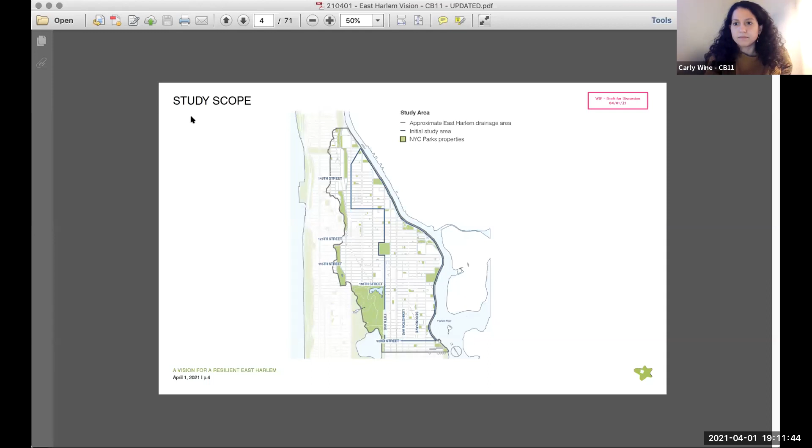Okay, I can help out here. So I see that you did share, you tried to share full screen. So what you're gonna have to do is share a new screen, because it's opening the full screen into a separate window. So if you go to the top where it says you're sharing your screen, share a new screen and select the full screen. I have to do that all the time when sharing. What I'm doing is I just opened up the email, the attachment in my email, and I reduced this screen and have it open in my email.

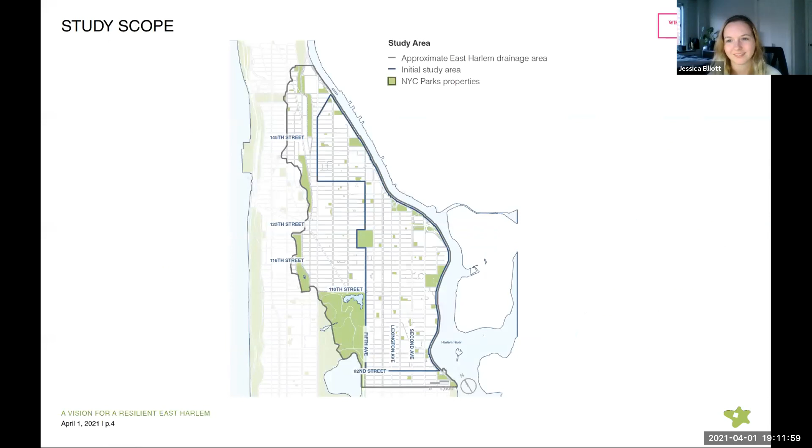So you guys see it working now? You see it advancing? Yes, perfect, thank you. I can't believe we're like 12 months into the pandemic and just finding this out now.

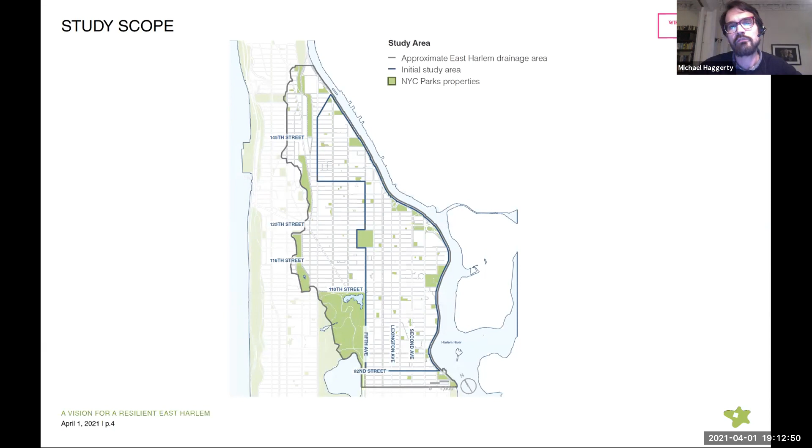Okay, so the study scope. The study area outlined in the RFP roughly corresponded with the floodplain in community boards 11, 10, and 8, and followed the major avenues around that. When we got into the study, we actually expanded the study area for analysis to include the entire watershed of Harlem and East Harlem. This was a 2,500 acre area where we took a broader look to understand the dynamics of drainage from rainwater in this bigger area. That was one of the first ways in which this evolved.

Our study process had 3 interrelated steps leading to the vision. We did work on integrated flood protection — analysis and conceptual design around sea level rise, coastal surge, but also cloudburst events, very large rain events. We had a social resiliency analysis, which consisted of trying to understand social infrastructure in the neighborhood, the kinds of community facilities people access, and the network of community and service organizations in East Harlem. Parks, as the lead, had a particular interest in the open space system, and as landscape architects, that's one of our lenses.

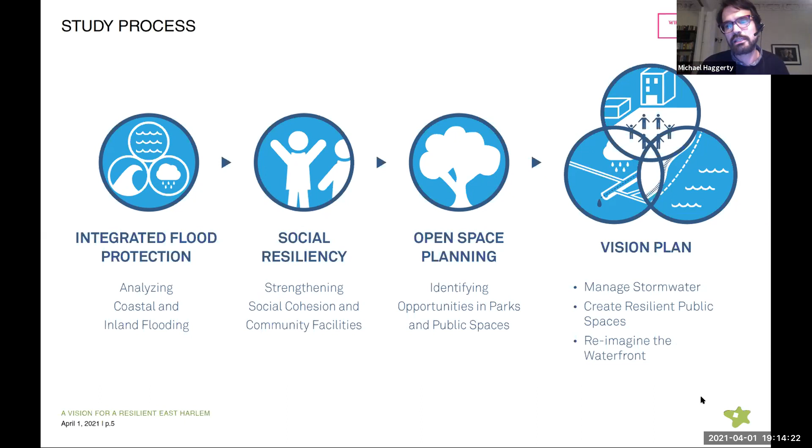So we looked closely at all kinds of open spaces — public parks, plazas, but also open spaces on NYCHA properties and private properties. Through these 3 studies, we then developed vision recommendations with 3 themes: managing stormwater, creating resilient public spaces, and reimagining the waterfront.

Did you see that change? Okay, so I just wanted to talk a little bit about what's unique about this study, and what's unique about vision planning, and why we did it with the city.

One reason is to understand risks. So we analyzed these 4 climate risks: sea level rise, coastal surge, cloudburst events, and urban heat and extreme heat. We wanted to understand what is unique about these risks in East Harlem — how do people experience them, and how does the topography and built environment of East Harlem relate to these risks?

We also wanted to explore solutions. When you start to look at it, there's no one solution for these risks — you need lots of solutions working together. Part of this process was to understand what kinds of solutions you would apply in this neighborhood, and how those solutions can support other goals of improving the public realm and bringing amenity to the neighborhood.

And then we also assessed the feasibility of these solutions. Working closely with city agencies, we looked at policy issues, considerations related to funding, constructability, overall city policy, how infrastructure is operated — to understand, from best practices, the opportunities and constraints for developing them in East Harlem. This led to recommendations, which we'll get to at the end.

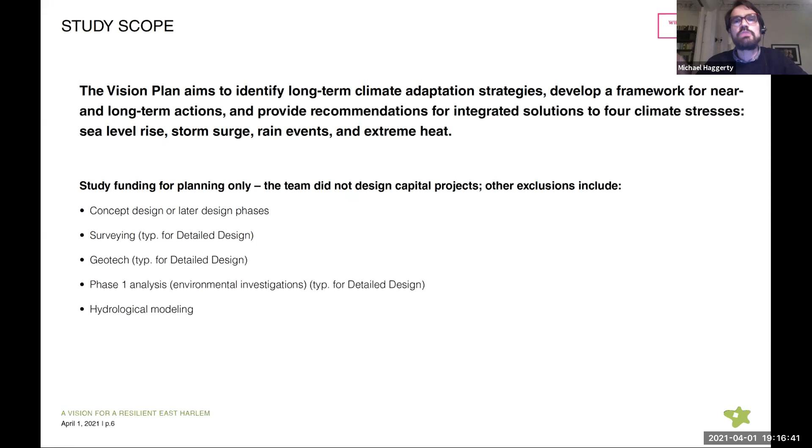We had a pretty lively community engagement process over 2018.

It had several different forums. We had a project advisory committee that we met with twice. That committee involved organizations that were community-based organizations, affordable housing developers in the neighborhood, cultural institutions, and health institutions.

We had 2 community forums. Both of these were at DREAM. That was really important to the study in terms of working with the very strong network of relationships that DREAM has with families in the neighborhood and also other organizations.

And then we also did quite a bit of tabling, six events in the summer of 2018. What we did for that, we went out and really asked people about social infrastructure as well as their experience of climate change, to try to understand how people are experiencing these issues in everyday life.

Another aspect of the outreach was that we actually developed a curriculum about climate resilience and taught this curriculum at DREAM Charter School. This was a semester-long class with 9th graders. It was actually the first cohort of high schoolers at DREAM, and it was experiential learning.

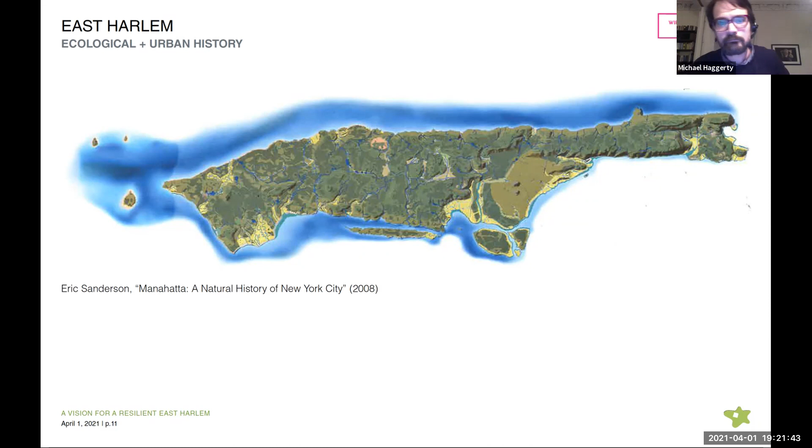And then also, because of the topography, Harlem Creek, Marcus Garvey Park, the hill there, Carnegie Hill - water historically drained through the area that is roughly 106th Street and 108th Street. When you look at more contemporary maps, like the Viele map from the Civil War that overlaid all of these historic natural features with the grid of Manhattan, you start to see how the grid was overlaid and land was filled in, but water more or less wants to still behave the same way. It wants to absorb into an area like a marsh. It's low lying, so that's an area that will flood. And then it wants to follow the topography out to the Harlem River.

Another really interesting set of maps we found that was kind of surprising was we looked back at old Sanborn insurance maps that were made of the city. The one on the left is of Thomas Jefferson Park in 1927. The one on the right is the same view, but in 1954 after Harlem River Drive had been constructed. This was kind of like a revelation to find out that Thomas Jefferson Park used to connect to the river, and there was an esplanade and a direct open space connection from East Harlem to the Harlem River.

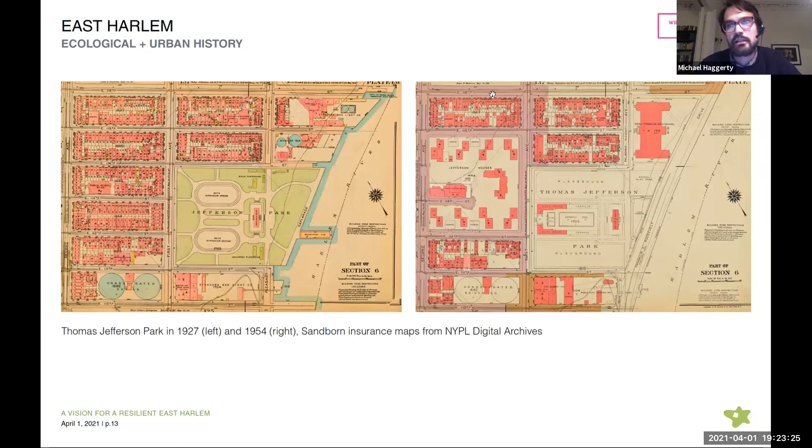But then, of course, decisions and planning in mid-century New York really cut the neighborhood off from the river. This is a real spatial equity issue that's been with the neighborhood for many years, not being able to access the river. So this was interesting to us to think about - well, in planning for resilience, how do we also address waterfront connections and some of these spatial equity issues that we're living with.

To get into the risk analysis, we start by looking at the topography of the neighborhood, which is on the left. What you can see is there are low-lying areas, which are the bluish, purplish areas. That's roughly where that tidal basin was, and roughly where the floodplain is today.

There are really two kinds of profiles as you go from upland in Manhattan to the river in this part of the island. This first section is cut further north, closer to 134th Street, and what you can see is that the land slopes from west to east down towards the river in a pretty continuous way.

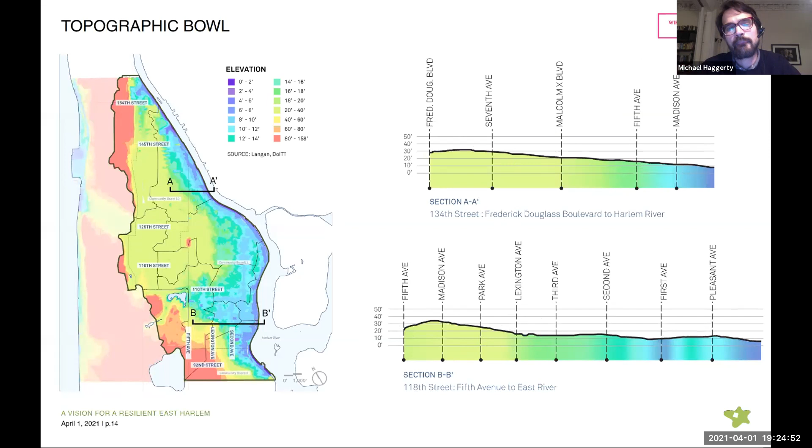When you look at the second section, cut through the heart of East Harlem, the topography has these basins in it. It isn't a straight slope, but rather there are bowls where water can accumulate. So you're dealing with both a low-lying area and an area with these kinds of basins, which are important to know about for stormwater management and drainage.

In this risk assessment, we did synthetic storm modeling, where we took projections from the New York City Panel on Climate Change reports to model two different flood scenarios, a low one and a high one. These scenarios combined projections for sea level rise, 30 inches by 2050, and included a cloudburst event, which is a really fast rainstorm.

We looked at the current 5-year rainstorm, which is the current cloudburst at 4.7 inches over 24 hours. Then we looked at the future cloudburst, which is 5.88 inches over 24 hours, and combined that with a storm surge.

In the low scenario, we looked at what is like a 5-year storm, kind of like a nor'easter storm today. And in the high scenario, we looked at the future 100-year storm, which would be something like a Hurricane Sandy.

The significance of these two elevations: this low elevation of 8 feet is basically dealing with flooding from high tides and a lower order storm. The 17.5 elevation is looking at what would be a future 100-year storm, or a future Sandy-like event or larger.

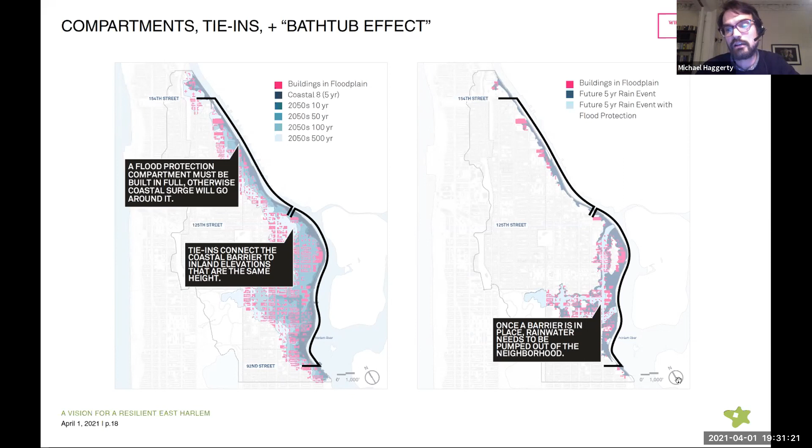And then just to show this in a different way, this is like an imaginary section from the neighborhood, showing one of these basins on the left here. So if the sewer system, which is the orange line here, and the outfall, if that's not working because of sea level rise or because of surge, you're going to have water accumulate in these basins. And then what we're showing here conceptually is that, well, if you build a barrier to keep out storm surge, you're going to have rainwater that backs up against that barrier that needs to be pumped out somehow.

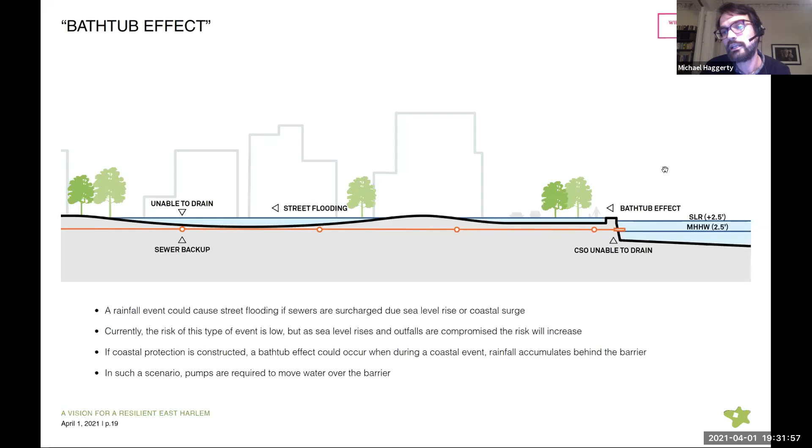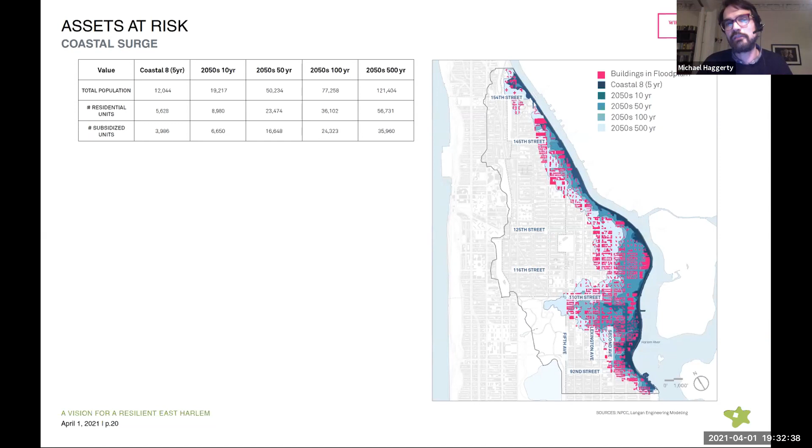This risk assessment then also used GIS to quantify the risk. We looked at population, housing, subsidized housing, critical infrastructure, parks, the transportation system, to quantify under these different flood scenarios, our high and low scenarios, but then also 10-year, 50-year, and 500-year floods, what assets were at risk from flooding. We did that for both the coastal events and also for the rain events.

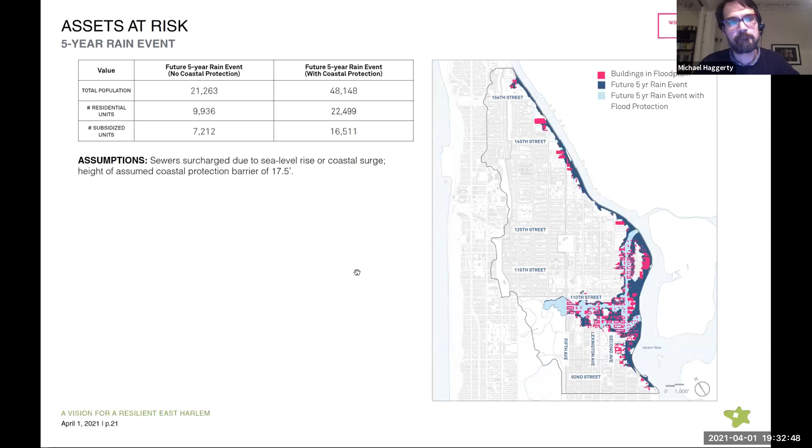That risk assessment data basically gives you the number of buildings exposed to flooding in a 100-year event, or the number of hospitals. That data was used to calculate avoided costs, which is just another way of saying the damages that an event would incur. And those calculations of the avoided costs supported a cost benefit analysis—basically a calculation of what is protected through flood protection and the value of those assets.

So cost benefit analysis is not a tool required by policy in New York City for funding projects, but most federal funding agencies like FEMA, the Army Corps, or HUD use cost benefit analyses to evaluate funding applications. So we use this tool in order to begin to align the analysis of this study with potential funding sources for projects.

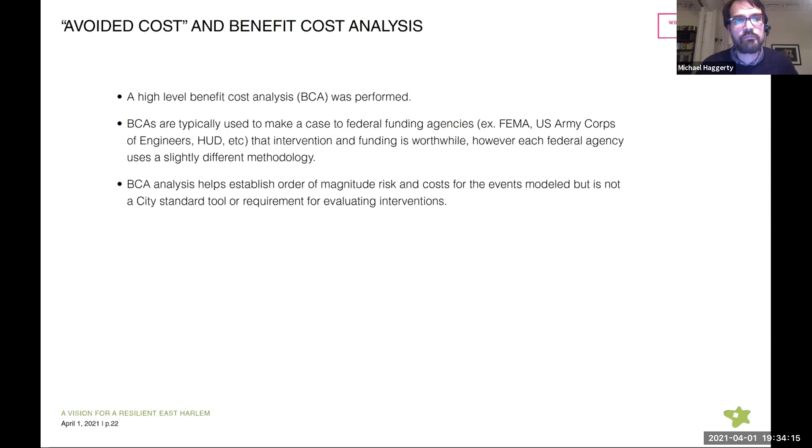The methodology used for that is called HAZUS, a tool provided by FEMA. It's basically like a spreadsheet where you input different figures for buildings at risk, building contents, open space assets, etc., and it calculates the present value of those assets over time. So we were able to look at a 50-year time period of potential flood events to understand what the cost would be.

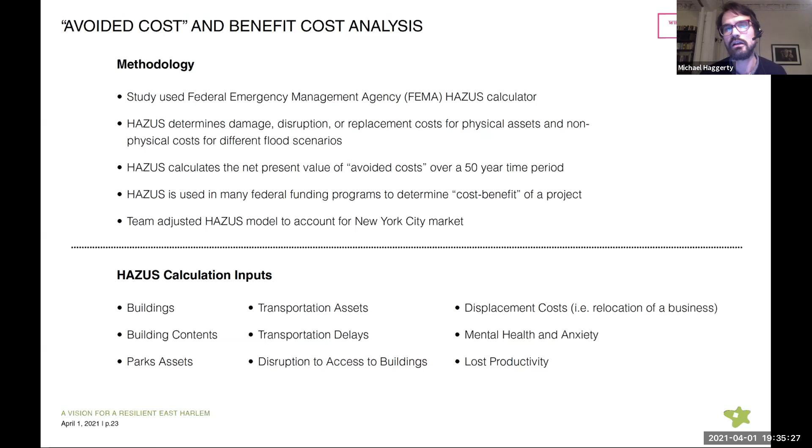There's actually a lot of detail that goes into this kind of analysis, and we needed to adapt the tool for the New York City market in terms of prices for buildings and those sorts of things. But it also includes what you might think of as intangibles, such as transportation delays, the cost of a business or family having to move, mental health costs, lost productivity. So there's actually quite a bit of detail that goes into those.

So this slide is showing some of the results of the avoided cost analysis.

One of the really important things we noticed when we did this analysis was that the avoided costs for the low scenario, like an elevation 8 event, were about $500 million. But when you went up just one increment to a 10-year event, or about a 10.5 elevation, that avoided cost almost tripled. So that told us there was a real gain in a slightly higher elevation than our low elevation in terms of the assets that could be protected.

The other thing this analysis showed us in terms of the cloudburst events, which is the table on the right, is that the avoided costs over time of the cloudburst events could actually be a lot higher than some of the storm surge events. The reason is because they're 5-year events, so they're projected to recur with more frequency. That told us there can be real value to a strategy that aims to mitigate the flooding from rain events.

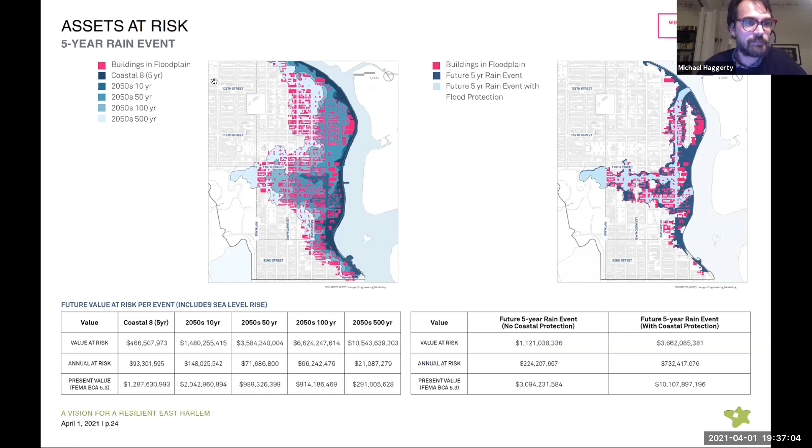So overall, in terms of the risk assessment, there were a few big findings. I won't go through all the bullets, but one big finding was the relationship between coastal protection and inland flooding from rain events - you can't really address one without addressing the other, and whatever solution we design, those two issues need to be addressed in coordination. It also told us there isn't a single solution to any of this, that it needs to be many solutions working together. And because it's many solutions, that gives us opportunities to think about co-benefits with climate resilient solutions in terms of improved public space or community spaces.

So those are the big findings from the risk assessment, and now I'm going to go into the vision framework.

From the project design perspective, there are a few important ideas. One is that we really thought about resilience in terms of urban systems - that it's not just about coastal protection, but about drainage infrastructure, transportation, public spaces, and housing. So when we thought about solutions, we were considering ones that cross-cut across different urban systems.

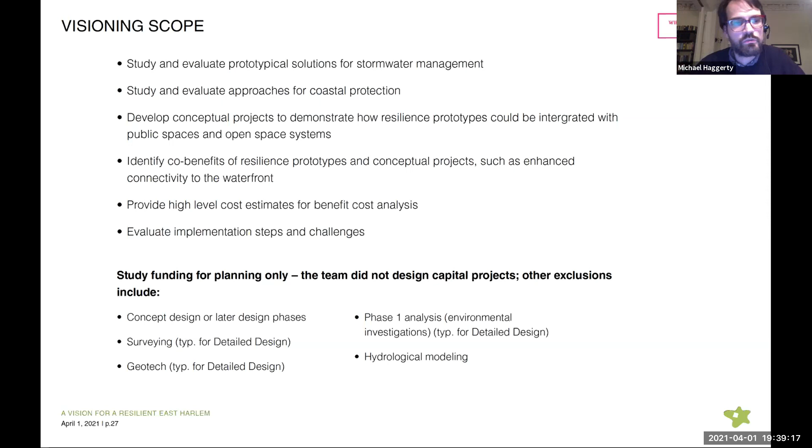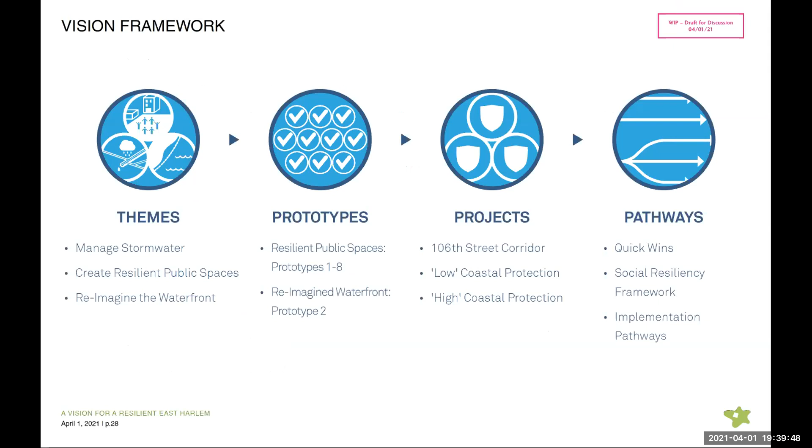The framework - getting back to the table of contents and outline of the study - is that we established three themes: managing stormwater, creating resilient public spaces, and reimagining the waterfront. What we did to expand upon these themes was first to develop prototypes for resilient public spaces that can manage stormwater, and then we developed three conceptual projects.

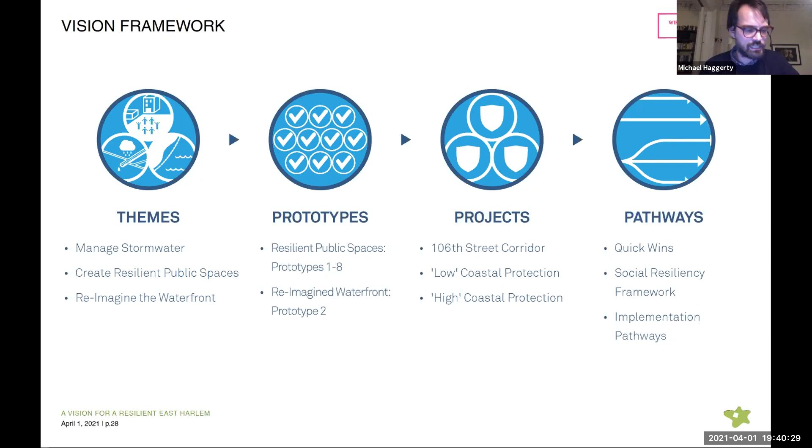These are more planning feasibility studies than conceptual designs. One of these projects looked at the 106th Street corridor and considered how to make that into a stormwater detention and conveyance corridor and an improved public space. The two other projects developed ideas for a low coastal elevation solution and a high coastal elevation solution. Lastly, we looked at how to make this happen - what are the implementation steps and policy considerations.

So this diagram represents those three themes mapped into the space of East Harlem.

The vision considers a reimagined waterfront, strategies for providing coastal protection and connecting waterfront parks to the river. It looks at utilizing streets and public spaces for stormwater management and creating an interconnected system for stormwater management. It also looks at social infrastructure in public spaces and how to make them safer and better connected, while also having these resilience functions.

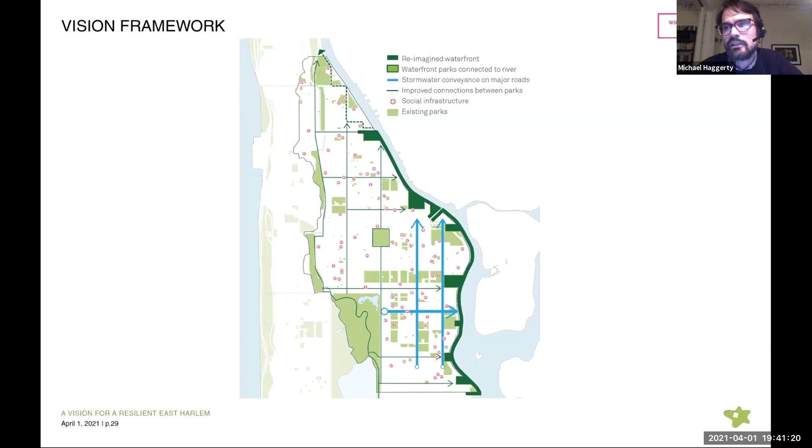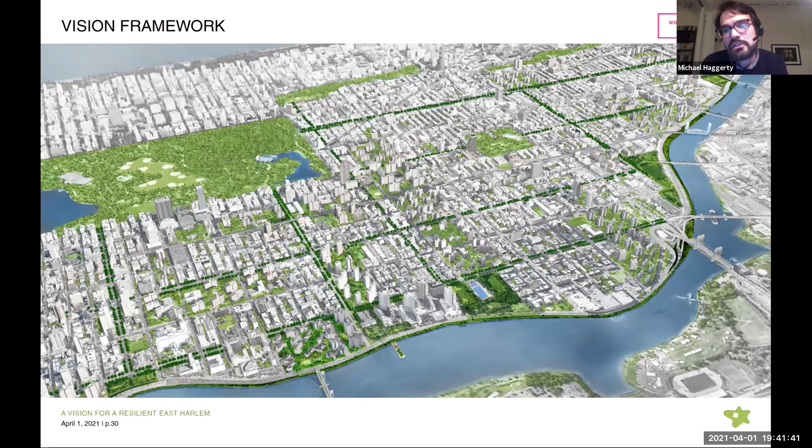In a vision of the neighborhood as a community, parks are connected to each other, people have access to the waterfront and also to Central Park, and open spaces serve resilient functions.

So I'll walk through how we expanded on those three themes and the prototypes and conceptual projects. As we talk about the first theme, managing stormwater, there's a little more analysis we did to better understand what's going on with the water from cloudburst events in the neighborhood.

I'd mentioned earlier that there are two profiles. There are areas of the neighborhood where rainwater basically sheet flows to the river, and then there are areas that have these basins where water can sheet flow but can also accumulate in low points.

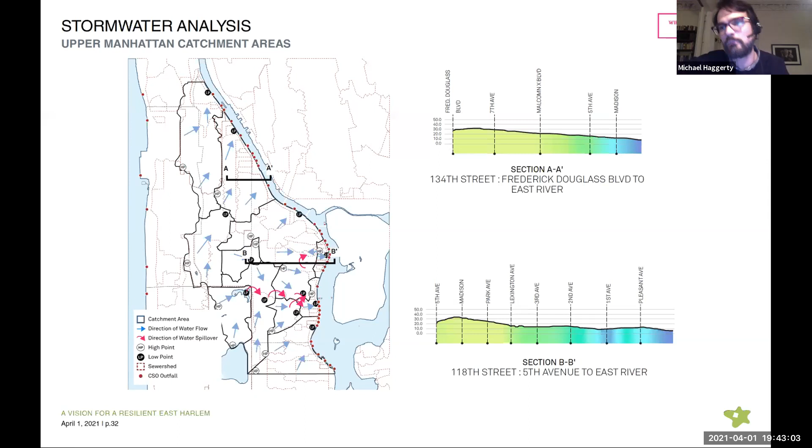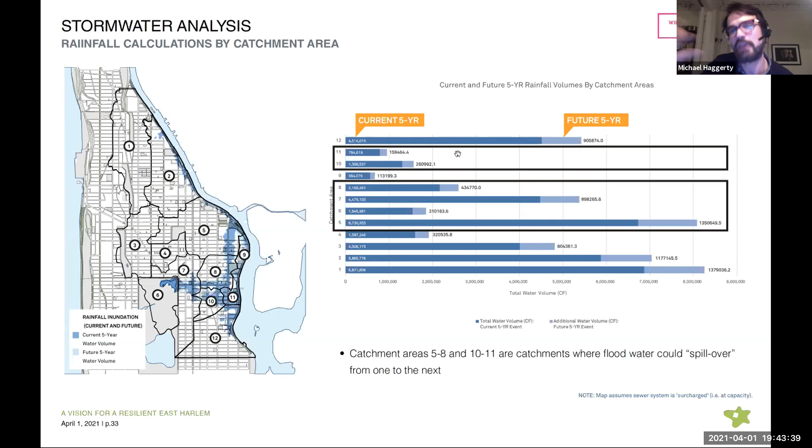We did some analysis where we quantified the cubic feet of water in each of the catchment areas that you'd have from this kind of cloudburst flooding. So in this map, the blue is showing the inundation area of the rainfall event. The black shows the different catchment areas or drainage areas of East Harlem. And these graphs over here that we outlined are the calculations of the amount of water that you have in each of those. And it's a lot of water.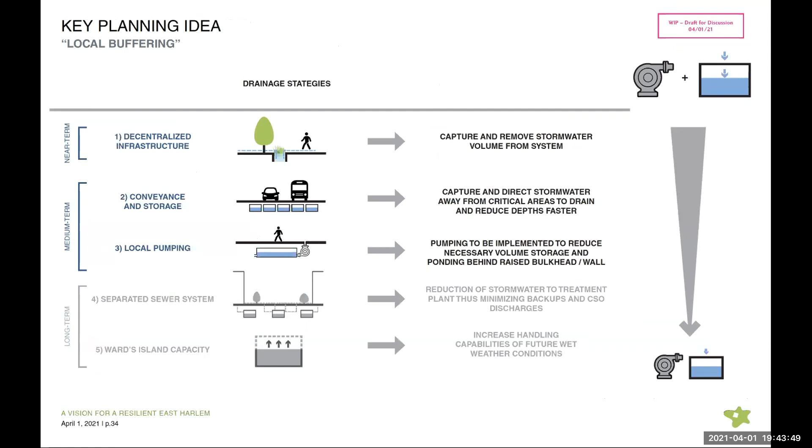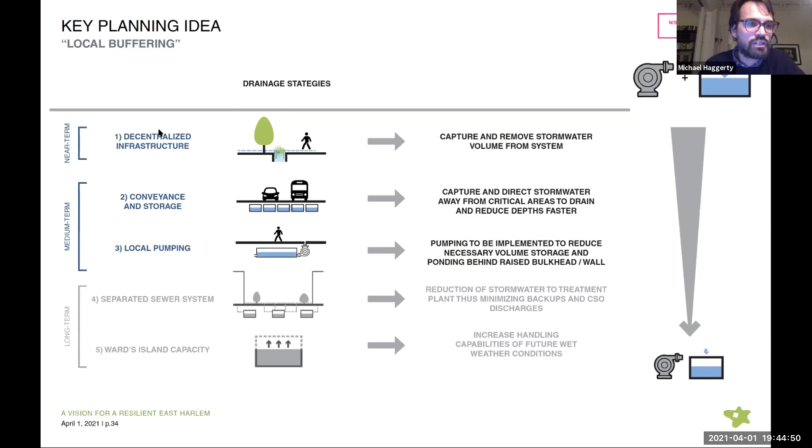So one of the key planning concepts in terms of managing stormwater is this idea of local buffering. How can we use green infrastructure, like infiltration in permeable surfaces, storage under parking lots or under paved surfaces, swales, in order to capture and detain as much of that rainwater as possible before it goes into the sewer system. Now, as our analysis shows, you can never really capture and store all of this water, but it's important to do as much as you can, and there's a cost benefit to it. As I mentioned before, if you have coastal protection and need to be pumping water and managing it with gray infrastructure, the more water you can detain with the green infrastructure, the more it reduces the size of the pump that you need, and reduces the amount of gray infrastructure that you need.

This idea of local buffering really implicates every kind of surface in the neighborhood for stormwater management: capturing water off of roofs, storing that in open spaces, or storing that subsurface, also using streets and reconfiguring the right-of-way, both above ground and below ground, to capture, detain, and convey water. So those are some of the ideas that this diagram is showing.

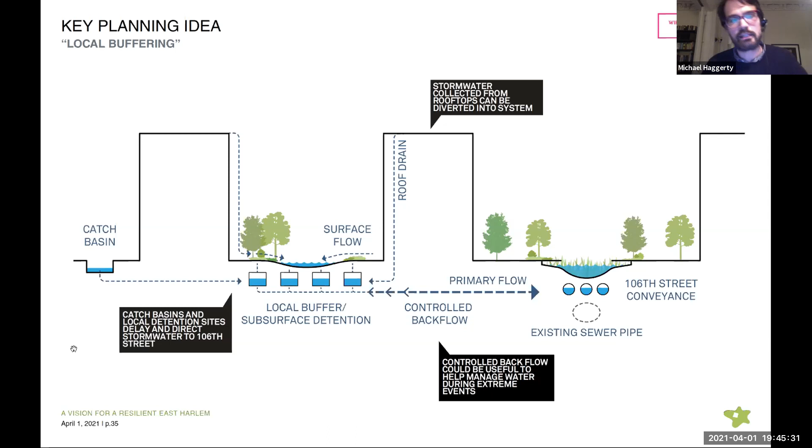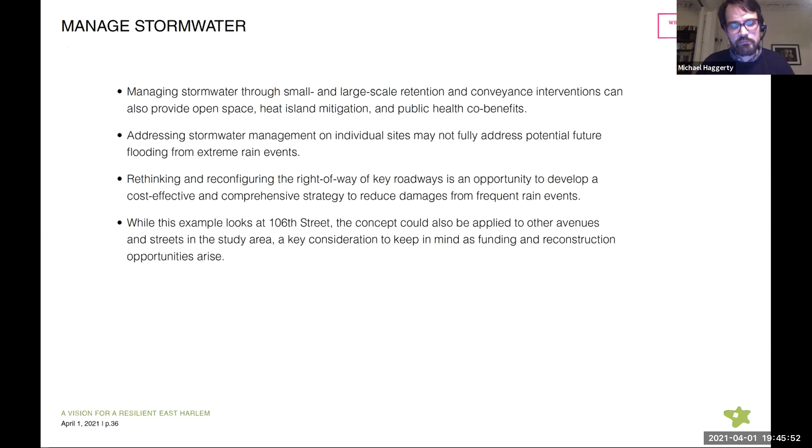So overall, what this theme was looking at was, first of all, how all green infrastructure can count and have a benefit. And then, if you are developing green infrastructure on a pretty big scale, how can that improve the public realm? Our conceptual project tried to tie all of that together around 106th Street.

Just a side note, 106th Street is a really interesting street. First of all, it was actually planned as a river-to-river street, and in the Manhattan plan, it was the northern boundary of Central Park. For that reason, it's extra wide — 100 feet wide with a 60-foot curb to curb, and it has a lot of striping down the middle, kind of excess space. It also happens to be the only street in East Harlem that connects all the way from Central Park to the waterfront, because there are so many super blocks and public housing and co-ops. It's the only continuous street, and it is in that historic area where the Harlem Creek was.

So what this conceptual project looked at was: can we find a model for reconfiguring streets, prioritizing bus, pedestrian, and bicycles, adding landscape to the street that can serve as green infrastructure, but then also increasing the capacity of the subsurface drainage in order to hold some of that stormwater.

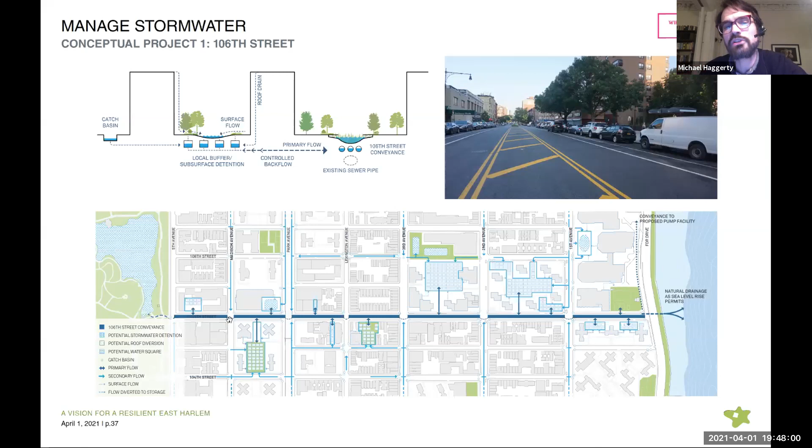We envisioned 106th Street as this kind of collector with branches coming off of it. Those branches would connect to green infrastructure installed on a variety of sites — playgrounds, open spaces in the tower in the park developments, parking lots, and other kinds of spaces. So this was envisioned as a system where you might have green infrastructure at Franklin Plaza, for example, or the Carver houses, and that water would be detained there, but then also drained to this new major drainage corridor.

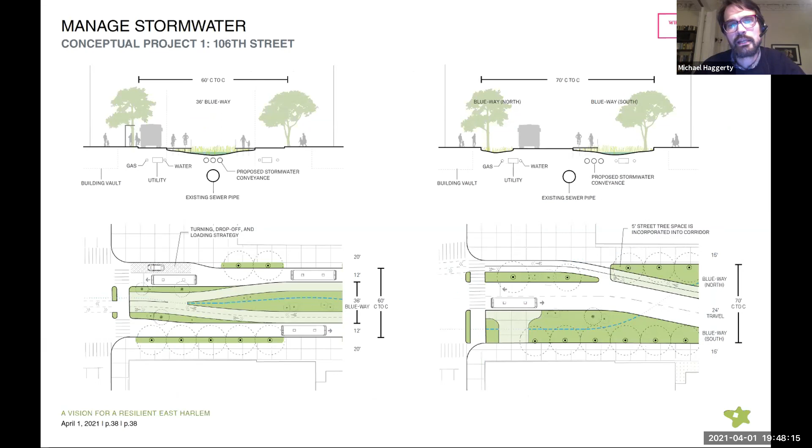There was some study here of: if you do this, can you prioritize buses? Can you prioritize bike lanes? And then also, can this corridor become this new kind of green space and green spine and commons that's shaded and cool and a social space for the community?

So just a couple of caveats about this study, and we don't have all of the solutions yet for this. One is that it doesn't manage all of the stormwater - it's a partial solution. But there's a benefit in this strategy in that it reduces the amount of gray infrastructure that you need.

The other consideration is parking. This proposal is taking all of the parking away, about 250 spaces. And then you also have loading - there's a couple schools on 106th Street that have bus drop-offs. So if you're really going to develop this kind of approach, there are a number of transportation issues to be resolved, both with city agencies, but then also with community members and institutions.

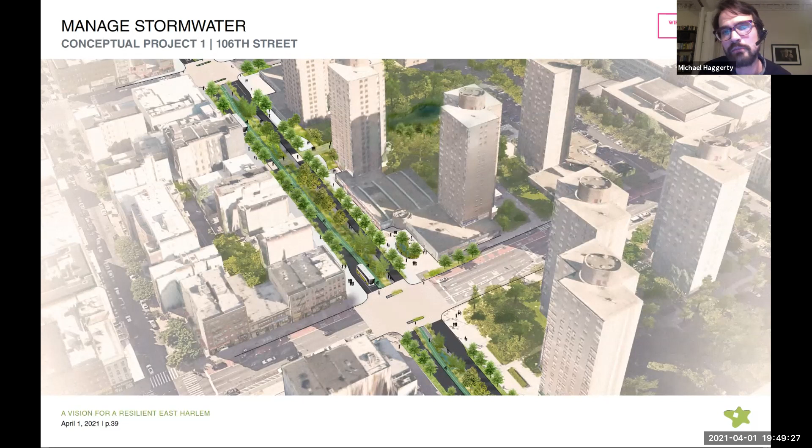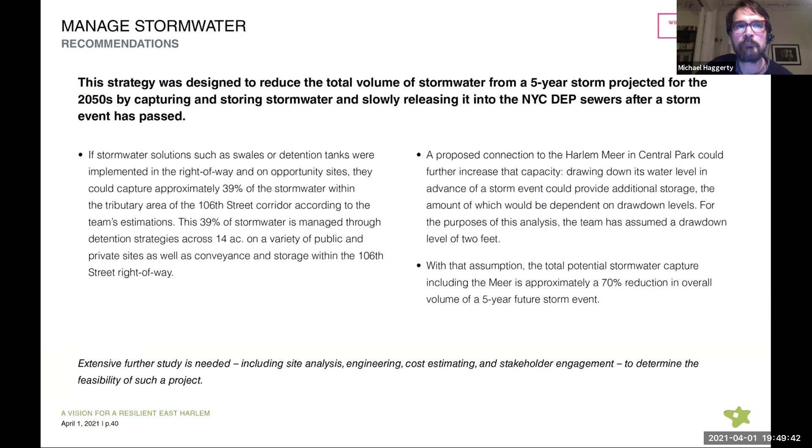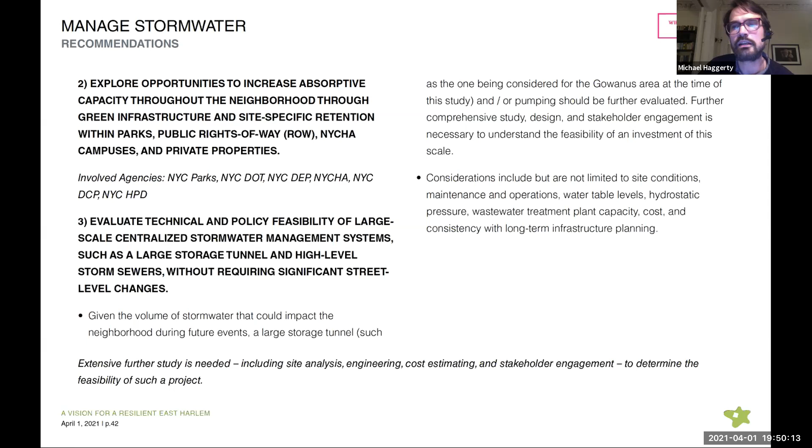So each of the themes has a series of recommendations, and here, this is where all the text is - I'm not necessarily going to go through all of this. But what we tried to do with the recommendations was chart out what are the next steps that the city needs to be taking in terms of study and analysis and feasibility in order to start to achieve some of the goals of the theme. These range from studying potential for green infrastructure across a range of different sites, to further engineering study of large scale storage. So this will all be in there for you guys.

So on to theme 2, create resilient public spaces. One of the principles of the planning was, how do you create high performance multifunctional spaces? East Harlem and also Harlem just has a lot of different kinds of open spaces and a lot of public spaces, parks, playgrounds, which fall into the domain of city-owned properties, but then also all of the open space around NYCHA properties, plazas that are on like the co-ops, for example, as well as parking lots.

So this part of the study asked the question, well, if we're trying to create this network of green infrastructure, how do we do that in a way that also improves these public spaces and improves the social infrastructure of the neighborhood? The theme had about 9 or 10 case study sites that we looked at. No coordination was done with the owners of any of these sites - we looked at them because they were prototypical, and you could find many instances of them throughout the neighborhood. But these ranged from community gardens to apartment super block apartments that have open space and parking lots and playgrounds and other kinds of spaces.

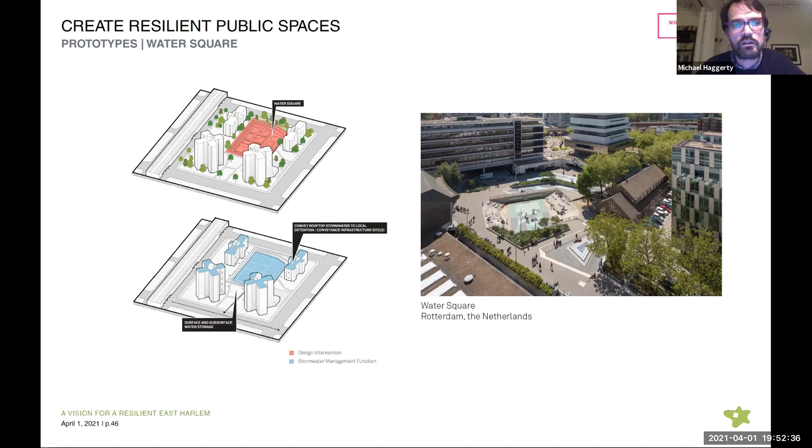So one area that we thought you might apply this idea is public housing, where you have asphalt recreational areas, whether you can lower those to an extent that they can store water in an event and also collect rainwater off of roofs, again to keep it out of the storm sewer system.

Over in Queens at the Borough Hall, they just rebuilt their parking lot that has green infrastructure. It has swales on top, but then it also has these plastic vaults underneath the parking that take all of the runoff from the parking and hold and detain it, and then either let it infiltrate into the ground or slowly release it. So we were looking at the possibility of places like the Savoy Park apartments that have these large surface parking lots, whether those could be retrofitted.

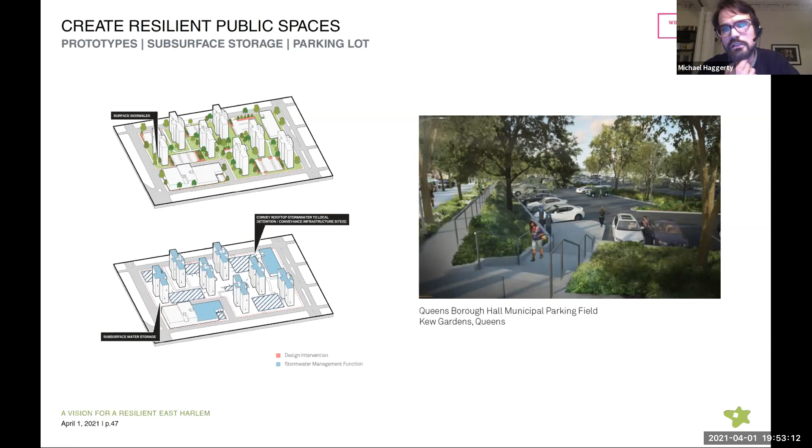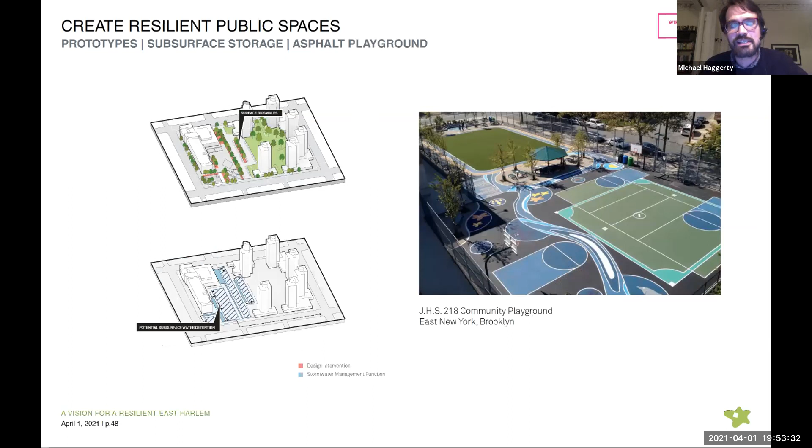Playgrounds, asphalt playgrounds and jointly operated playgrounds are another opportunity for that kind of subsurface storage. This example is Poor Richard's Playground, which is actually one of the lowest points in one of those basins in the neighborhood. And then also the right of way - are there opportunities again over in Denmark? Bike lanes are often constructed with a kind of conveyance channel under them to collect and store stormwater. So that was another prototype that we were looking at.

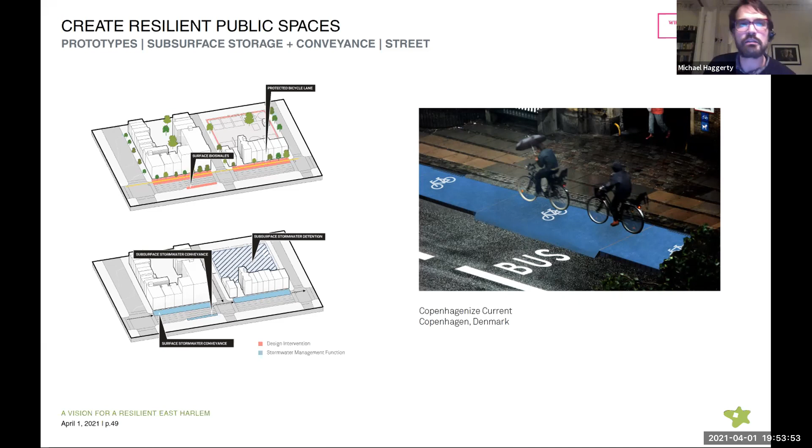So the recommendations for this theme were considering - one thing that we heard was this sort of need for multi-generational spaces. One idea for further study is how, when spaces are retrofitted, we take into consideration their social use and make them more welcoming. We also thought that this network of community organizations in East Harlem could have a real role in this, where many of the organizations and institutions have facilities with small public spaces, and are there opportunities there to involve those groups and their constituents in resilience.

And then also all of these strategies involve increasing tree cover in the neighborhood and addressing heat island effect from extreme heat.

So the third theme is reimagining the waterfront. This theme was studying approaches for how you elevate the waterfront, and what are the opportunities for connecting to it. What are some of the implications for Harlem River Drive, since the Esplanade for much of the study area runs along the water, and Harlem River Drive is beyond it, then you have the neighborhood. Are there opportunities for connecting the major waterfront parks over Harlem River Drive to the waterfront?

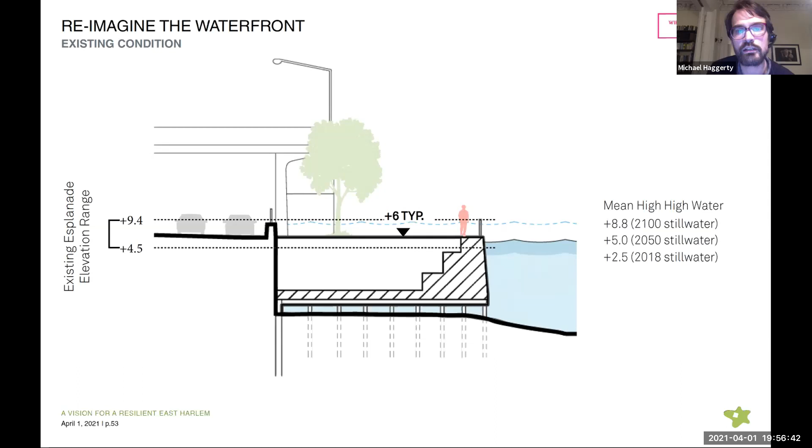The elevations range from 4.5 to 9.4 feet at the water's edge currently. High tide now is like 2.5 feet, and in 2050 high tide is projected to be 5 feet. So one near-term goal is elevating the waterfront to address the high tide elevation.

We did an analysis that looked at the entire waterfront and the elevations at the water's edge. This is a pretty interesting diagram to inspect. This line is exaggerated, but it represents the waterfront elevation. The low point on the esplanade is 4.5 feet here, and one of the high points is 8.5 feet, just south of the RFK Bridge. When we did this, what we noticed is that most of the waterfront is between 6.5, 7, and 8 feet. So elevating the waterfront to 8 feet isn't that complicated, because you're only going up a couple of feet.

That led us to think about the point I made earlier about the avoided costs benefit of going up to 10.5 feet. This was another analysis that led us to think about 10.5 as a target elevation, since elevating to 8 or 9, based on current elevations, isn't a heavy lift.

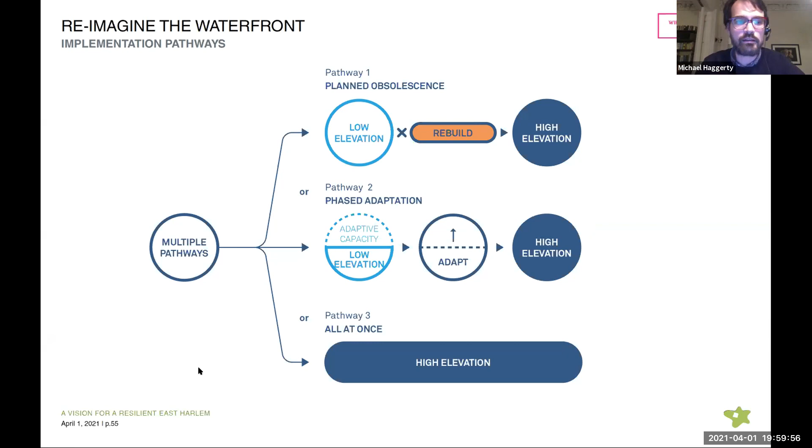Showing here that diagram of the flood compartments again, because these two conceptual projects for coastal protection are really looking at how you build a compartment. We focused on the southern area of East Harlem because it had the much deeper floodplain. But some things we have to think about with any kind of higher elevation on the waterfront: first, having a complete compartment - the linear feet of it is quite extensive, from 92nd Street up to 125th. The Esplanade is also very narrow in certain places, and it all needs to be reconstructed.

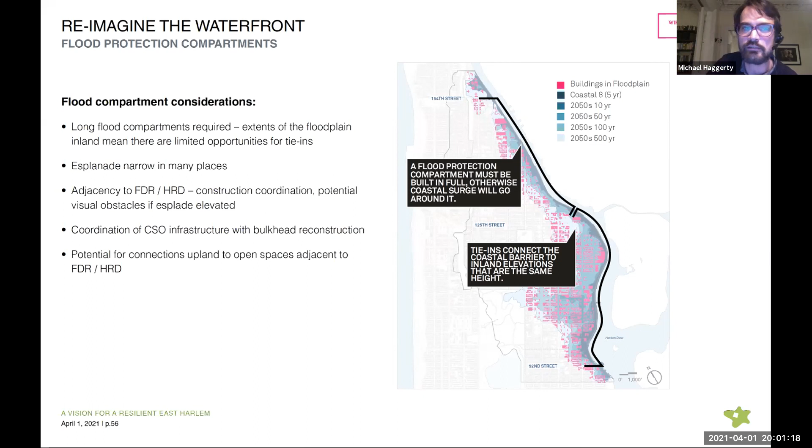There's the adjacency to the FDR and Harlem River Drive that creates a lot of construction coordination. If you're elevating the waterfront, there are visual considerations for the road as well. All of the CSO infrastructure is on the riverfront, and there are also opportunities to connect to open space. So part of this process was really getting out there - what is the scope for a project of this kind, what are the considerations, and what agency coordination is needed?

We looked at it in two ways: the low elevation that we first studied, and then the high elevation. One project looked at going to 8 feet, another looked at how you'd go to 17.5. Here we're showing how we broke it down into a kit of parts or prototypical conditions.

For the low elevation, one of the main challenges was how do you reconstruct that bulkhead? Do you reconstruct it so the bulkhead wall is still against the highway, or do you fill in the area under the bulkhead platform and move the bulkhead to the river?

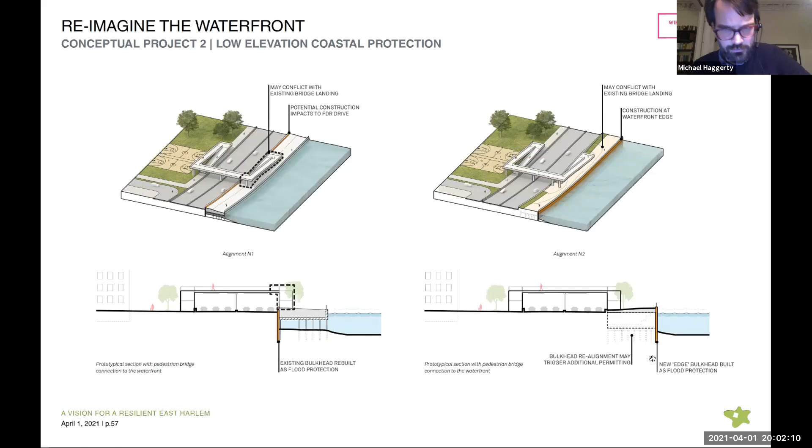The third conceptual project looked at the high elevation, where we developed a more robust kit of parts and strategies for how you would elevate to 17.5. One approach was to simply elevate the Esplanade up to 17.5 and create pedestrian bridge connections over to it. A second approach was to actually remove the Esplanade bulkhead altogether and create a deck over Harlem River Drive and the FDR, so you have a park space up there, with the edge of the highway having a wall as the barrier.

The third approach was to look at how you could elevate parks adjacent to Harlem River Drive, deck over Harlem River Drive, and then elevate the Esplanade so it becomes a more complete, interconnected system. The fourth approach was to go outboard—reconstruct the bulkhead but create an outboard levee or soft edge that would also be park space, but could be habitat in the water.

As you can imagine, all of these have major permitting implications. Anytime you're going to fill in the water or go into the water, that triggers various regulations about having to mitigate and such.

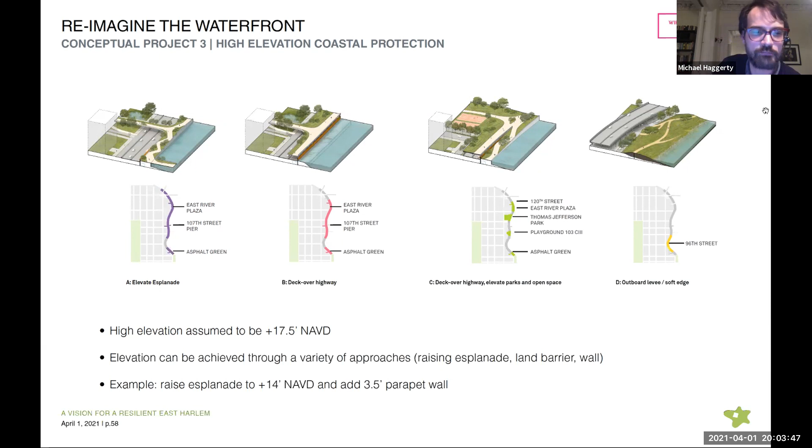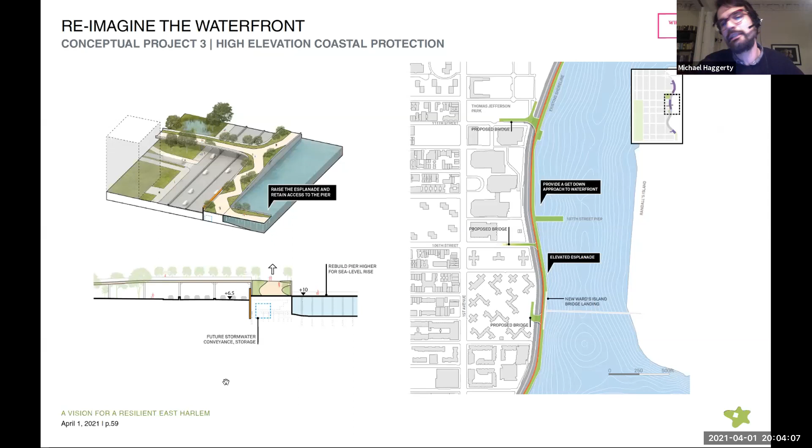So the study looked at just a few critical points along the waterfront, really to start to understand how this kit of parts might be applied and what the opportunities were for connecting the street grid and connecting parks to the waterfront.

So for this theme, in terms of recommendations, we're kind of in the near term. The recommendation is, as the Esplanade is reconstructed, to elevate it to a range of 8 feet to 10.5. With the Greenway, we're going to go to 10.5. That's not going to provide flood protection for the neighborhood because it isn't the complete compartment, but what it will do is protect the park up to a certain level.

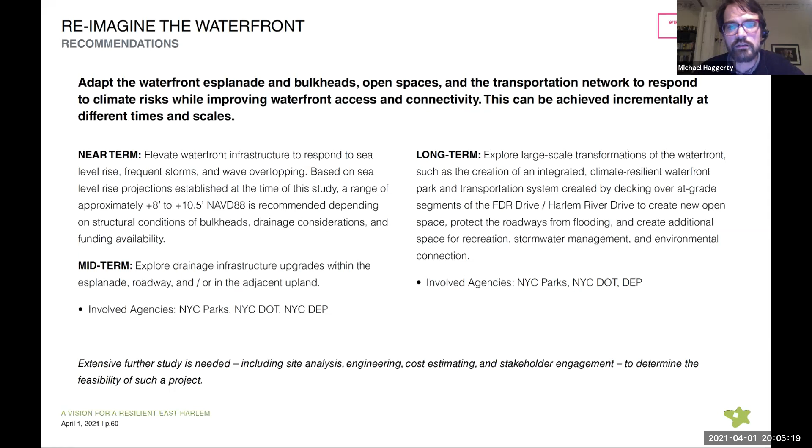So there are avoided costs in terms of having to replace park equipment if there's a flood. In the midterm and long term, the recommendation is to study the drainage infrastructure along the waterfront and what needs to be done in terms of sea level rise. And lastly, to continue studying full compartment and how you would elevate the Esplanade higher to create this continuous park and coastal barrier from around 92nd Street up to 127th.

Okay, so lastly, as I mentioned, the end of the report is cost estimation and benefit cost analysis. We did do cost estimates for the 3 conceptual projects that we looked at. Those cost estimates included construction costs.

We looked at costs of impacts to Harlem River Drive, costs of renovating open spaces. All of the bridges along the waterfront would be impacted in some way, both pedestrian and vehicular bridges, so the costs of intervention there. And of course these cost estimates include general conditions, overhead and profit, with escalations and contingencies built in.

Those cost estimations are limited in a way because the high level nature of the study doesn't surface all of the unknowns that you would get into if you started to undertake projects of this kind.

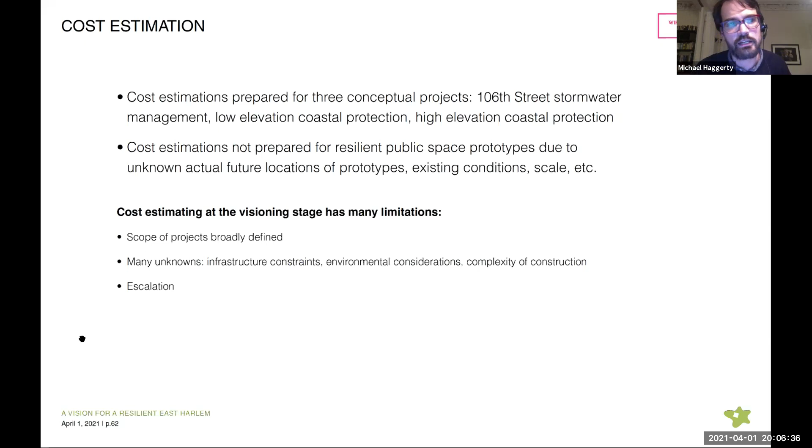Okay, so I'm going to summarize and wrap up here. Our big takeaways—the lessons everybody should know—first of all, it was a marsh, it was a lowland, and that ecological history is a real determinant of the flood risk today. So it's important to know about that.

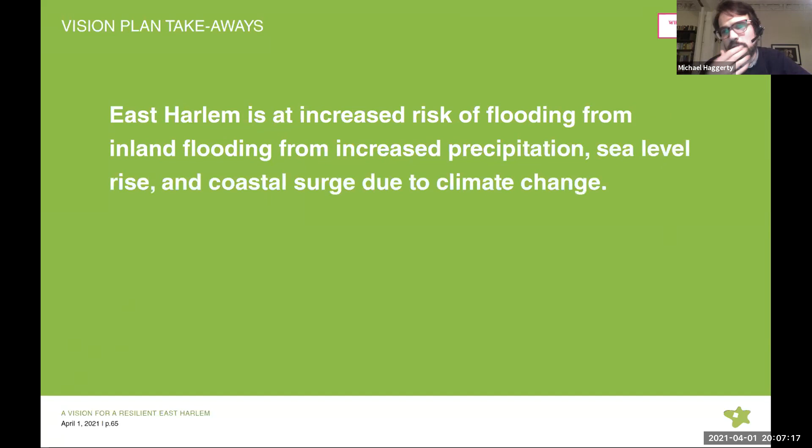Climate change is going to affect the neighborhood both in terms of increased hurricanes and coastal surge, but also from cloudburst events and increased precipitation. And these risks don't care about jurisdiction—they don't care what agency owns an open space or a building.

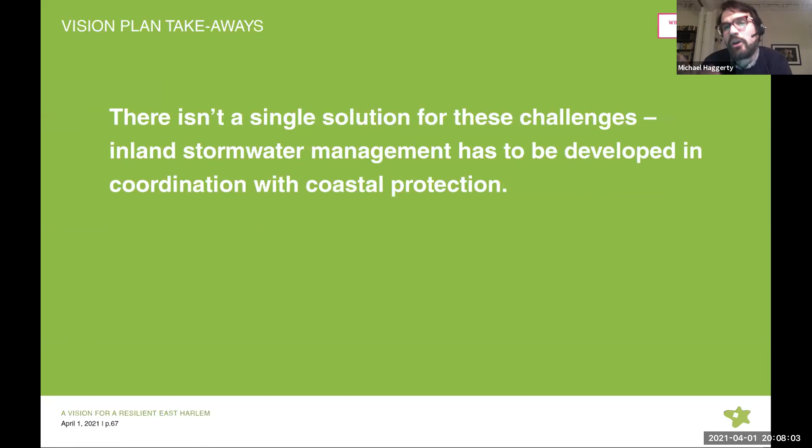It cuts across all of the systems, and for that reason all of these solutions are multi-jurisdictional and really require the consensus of agencies. And then there's also not one solution. I think 106th Street is a really good example of that, where the solution for mitigating the flooding upland is really lots of sites that get tied together over time. And I think the way we feel about it is that any part of that has utility and has a benefit and will be important.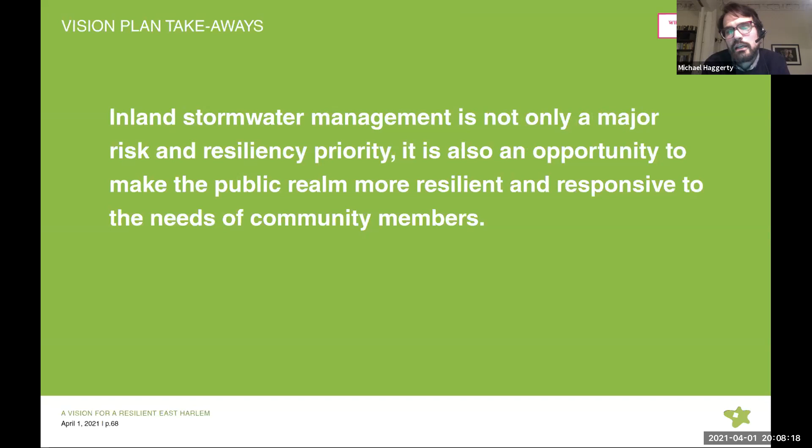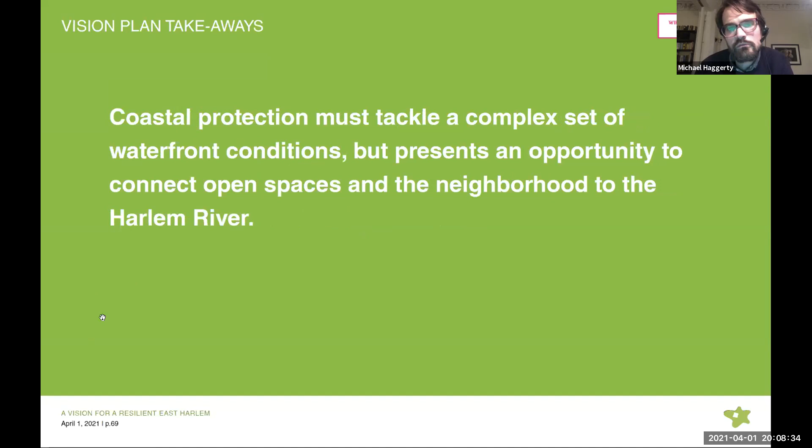Addressing these risks is in part about building infrastructure, but also just as importantly about improving the public realm of the neighborhood. That's what we tried to show with our prototypes. And there is this opportunity to really connect this community to the waterfront through resilience projects of these kinds.

To wrap up, we're at very early stages. This study got the city very far in just understanding the problem and understanding the range of solutions. It surfaced many of the kinds of policy challenges that need to be considered, and we'll need to continue to work on these projects. But really the value of the study is to start to scope out these projects, understand their extents, understand their costs, so the city is positioned to undertake them in the future. Okay, so thank you very much for listening to all of that, and we're looking forward to your questions. Thank you so much.

It was, I just feel like we received a masterclass in resiliency. I am an architect and I work with landscape architects and planners, so it's great to see the work and thought that you all have put into all of this study. And it's great to be able to share it with the committee and the community. So thank you for listening to our concerns and requests in that way to help bring more information to help empower us as a community board to advocate for the right solutions.

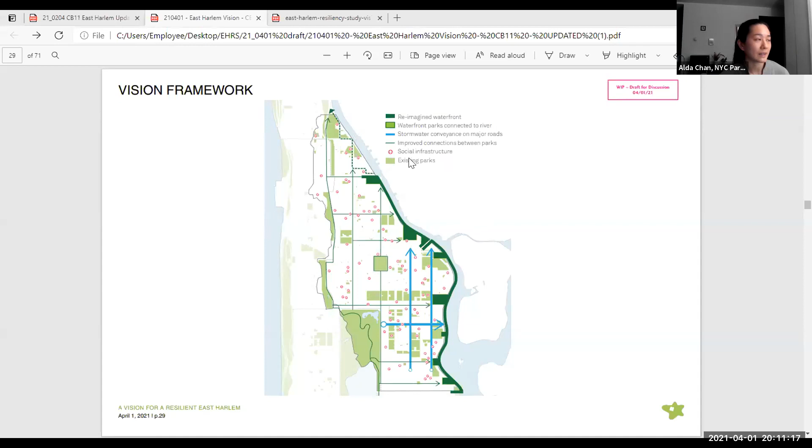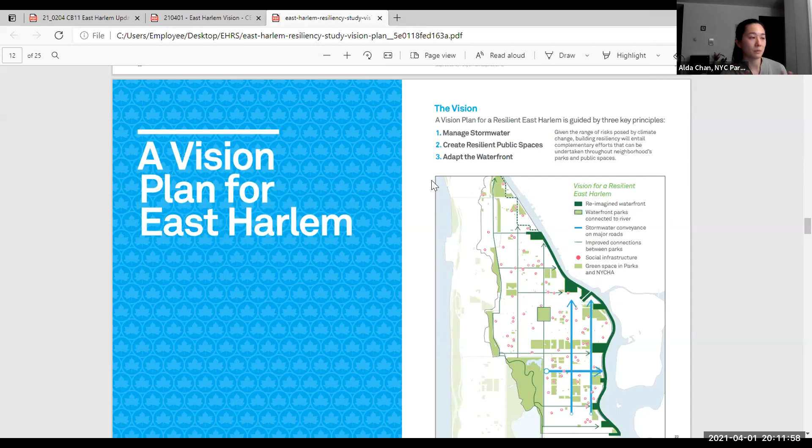So I'll start, thanks so much. We'll try not to take too long. I will also try to share screen just as reference. So this is what Michael was just going through, and for folks who have seen our vision report, we actually do include the same diagram. The final vision plan is more public facing, more summary language, less technical detail. We're happy we had the opportunity to bring the team in to talk you through all those details today. But the overall framework of the vision plan, which we've talked through last February and the year before, still focuses on managing stormwater, creating resilient public spaces, and we changed the terminology for the waterfront to 'adapt the waterfront,' but same buckets of recommendations. For managing stormwater, we ended up focused on and recommending a more general look at stormwater management at a number of sites. Our plan does emphasize East 106th Street, but we also identified a couple of other major rights-of-way.

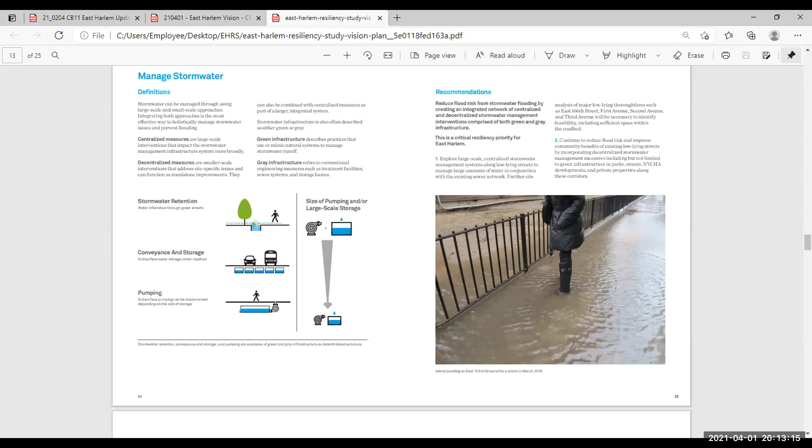Sure, Michael. Hi, this is Kenneth Lamb. I work at DEP in the Coastal Resiliency Coordination Unit.

As we're reviewing some of these concepts, some of our main concerns were constructability issues, O&M access to our existing infrastructure, as well as other conflicts you might run into, for example on East 106th Street you have a GI, then additional pipes above our existing combined sewers. So when you put all that infrastructure in there, space is an issue, right? We know there's subway lines that cross a couple of these avenues, and I believe there's a Metro North line somewhere on Park Avenue or one of those other avenues.

But basically, those were our key concerns, and whether or not it's really buildable. And when you do build them, our sewers are based on gravity flow, so you have specific design criteria that these sewers have to follow. DEP has a drainage plan design criteria where the sewers have to meet a certain slope, a certain velocity, so that you don't collect sedimentation and create more O&M within the pipes for the agency. So those were some of our key concerns based on this specific concept.

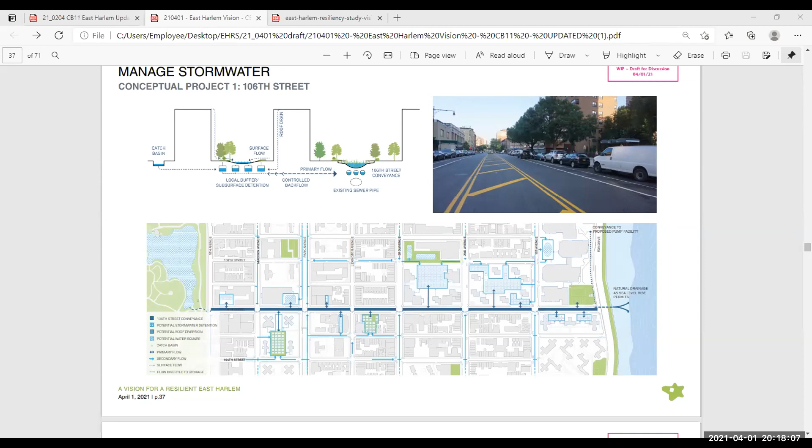And most importantly, we deal with the fire department a lot, and they represent the ambulance folks as well, as I'm sure you know. If you're backed up in traffic for whatever reason, a fire truck is allowed to go through the yellow stripes to get to the fire, and the ambulance is allowed to go through the yellow stripes. So we had to flag that if there were literally, we call it a cattle chute, just one lane in each direction, then we wouldn't even have that relief for emergency vehicles. And it's not a street where we could imagine there wouldn't be a need, because it is in fact the only street that goes through, like we said, until 116th.

I'm sure everyone's also seen the street construction. Aside from water and sewer, every company—electric, cable, telephone, gas—has infrastructure under the street, which limits the amount of space below. Ken referred to it as a maintenance issue, but you can't put one utility directly under another, because then it's like a multi-layer sandwich trying to get down to the utility below the utility. What we do is put it in channels across the street.

So the idea of having electric under plumbing, with gas at the bottom, isn't workable. And if all of that was under one travel lane, changing one gas line would be an issue. If we had to change one gas line, we'd give instructions to have traffic go around. If it becomes physically impossible, then one little service problem would close off the street.

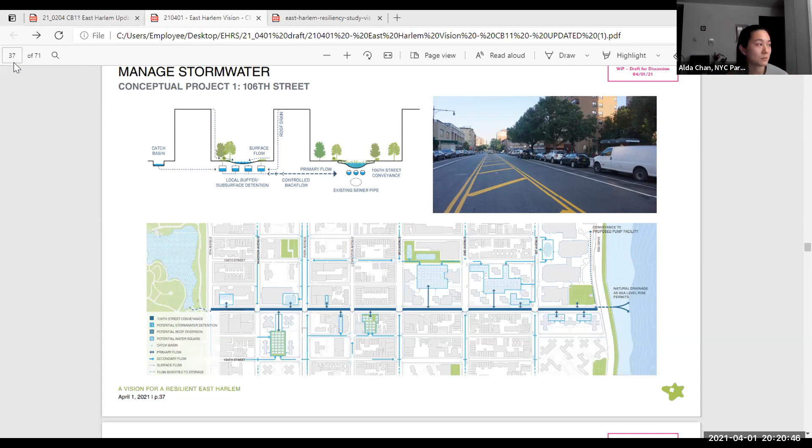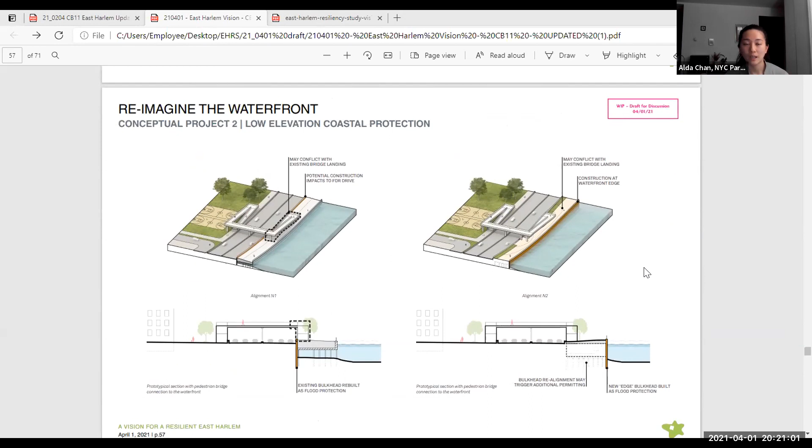I think the next one I'll briefly touch on is the longer-term waterfront coastal protection, which I'm sure folks have interest in. I'm just going to jump to this. I might defer to folks at Jordan and MOR to speak a bit more about how we think about and consider long-term or high-elevation coastal protection projects.

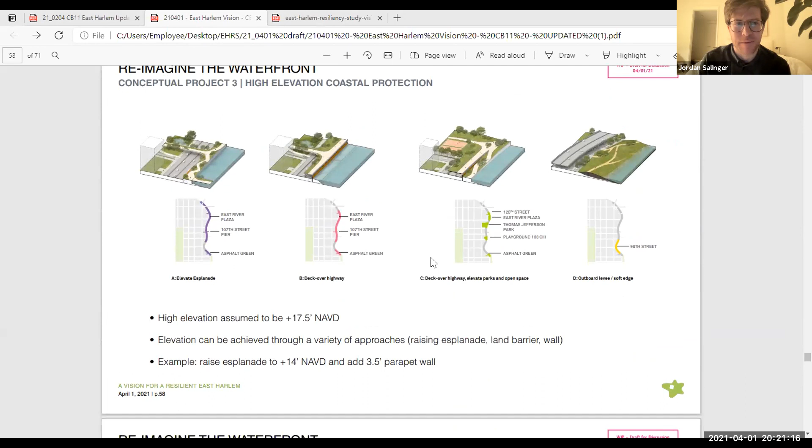Sure, thanks Alda. I'm very appreciative of the different designs. The main point here is that we've been making progress on the near-term side. The long term—these are all gigantic moves, there's kind of no half measures here. Even options A, B, and C, in some respects the on-land ones, involve dramatic changes to the built environment.

Option D, the outboard solution—we talked about the limitations from a regulatory standpoint. The current framework is one where going out into the water is really not acceptable. That's a conversation happening in Lower Manhattan, and certainly one the city expects to be having in the future, but the last 40-50 years of environmental regulations are such that it's just not a conversation the DEC and the Army Corps are open to. So I think it's a big, bold response to a big, bold problem.

Also, just one other note—this is, not unexpectedly, very, very expensive. Back in 2018, 2019, the federal climate and funding for these projects was very different. If you've been following the news the last few days, there's a new set of opportunities for the city. We're learning, just as you are, what those might look like. There's certainly a brighter future in terms of coordination on big moves like this, and I think it's partnership that's been lacking. We're looking forward to having those conversations.

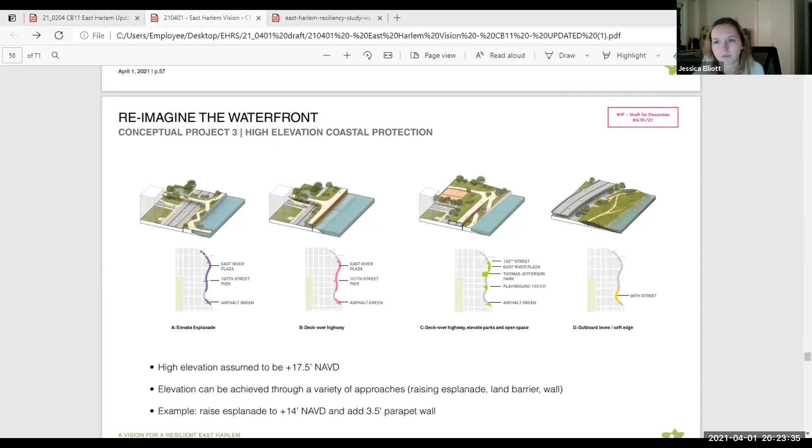Thanks so much, Jordan. I don't know if other agencies wanted to chime in at all. If not, recognizing what time it is, we can pause here for questions. But thank you for letting us speak a little bit. Yeah, thank you so much. It's great to have the team of different agencies here to hear about the challenges and things they think might be successful. So again, please raise your hand if you have any questions or comments.

My question is—Jordan, you just mentioned that these longer-term projects are going to have large-scale implications in the built environment. So I'm wondering if there's any benefit to taking a piecemeal approach to these improvements, as renovations to streets or, for example, the 2nd Avenue subway are implemented. Can we bake in some of those resiliency strategies into those moves since they're already needing to occur?

I think this was covered in one of the final takeaways, and something we knew through the process but really cemented through this work is that resiliency is not any one thing. It's not a wall at the water, it's not a giant pump station. It's in all of our decisions moving forward in how we think about our streets, our sidewalks, wherever we can find opportunities for embedding it. You see the agencies here tonight, and this is just the tip of the iceberg. So I think it's not either-or. We do need to make the big, bold moves that are challenging and require collaboration across the board, but we also need to embed resiliency in every smaller decision.